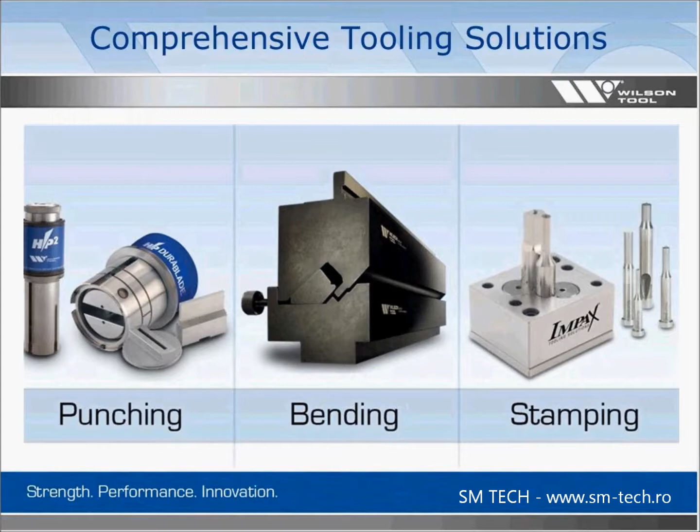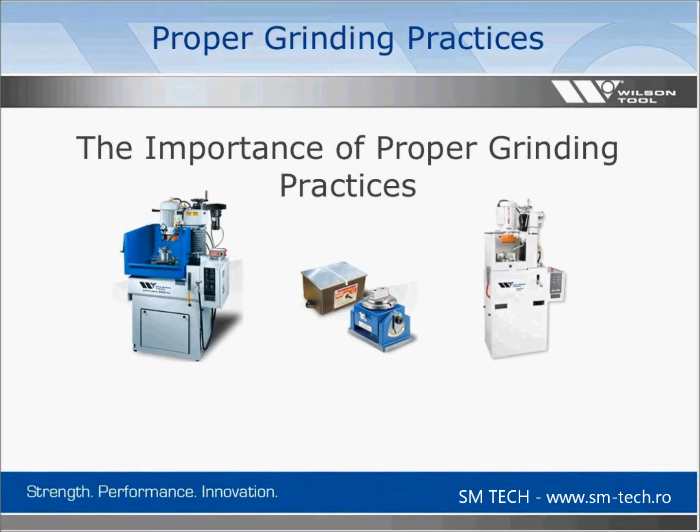We're going to start with maximizing tool life today, and the topics we're going to cover are proper grinding practices, surface enhancing coatings, and some of the different innovations in tool steels available in today's tooling. We're going to start with proper grinding practices. Proper grinding practices is one of the most basic functions that you can perform to ensure that you're getting the most life out of your tooling.

The number one most important thing when grinding your tooling is to apply coolant to the tool during the whole grinding process. Without applying coolant, heat buildup can result in an actual change in the metallurgy of the tool, and it can drastically affect your tool life. We recommend making very light passes with your grinder, only removing 5/10 to a thou in a pass, otherwise that excessive heat buildup can occur.

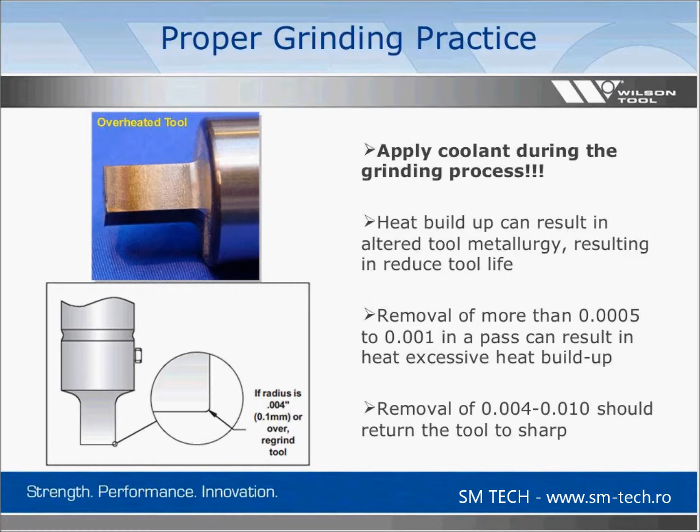When that heat buildup occurs, the tool can actually become brittle, or on the opposite end, it can actually become soft, and the tool will wear down much faster. You should never have to remove more than 4 thou to 10 thou of material in any given sharpening. After you've sharpened the tool, we recommend running an Arkansas stone or a light oil stone around the perimeter of the tool. This is to remove the burr.

You don't have to get aggressive with it, just run it lightly around the edge of the tool to knock down that burr. If you don't knock down that burr, when you're punching holes, it can mimic deflection or even cause excessive wear on one side of the tool, or it can mimic misalignment.

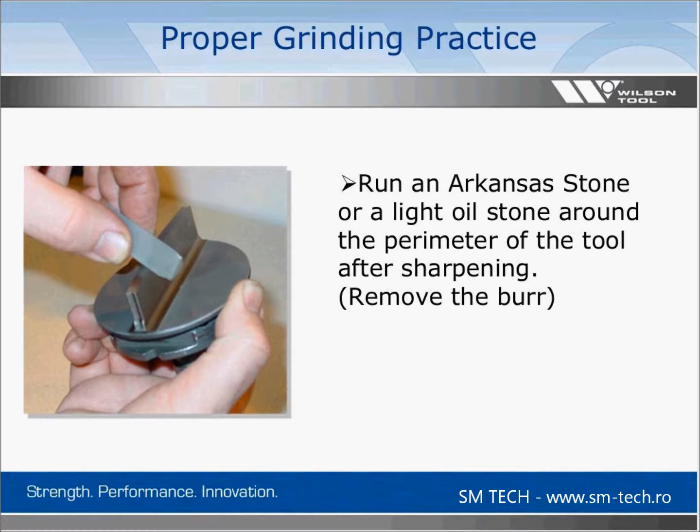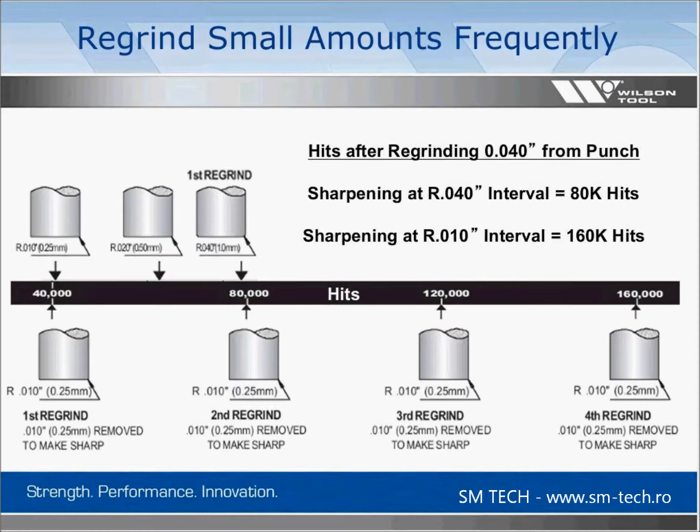This illustrates the benefit of sharpening your tooling in more frequent increments and removing less material at a time. The tools will last drastically longer.

Proper grinding practices and grinder considerations. Some of the different considerations when you're considering a grinder are the type of grinder. Are you going to use a bench or a pedestal grinder, a surface grinder, or a rotary grinder? We do recommend a rotary grinder for sharpening your tools.

You need to take into consideration the capabilities of your grinder. Does your grinder have auto feed capabilities, or is it manual feed where the operator of the grinder has to babysit the grind the whole time?

Do you have the necessary fixtures in your shop in order to do all the various styles of tooling that you have in-house? And do those fixtures also allow you to do the shear angles on your tool that the tools may possess? Also consider the quality of the grind.

How much material is being removed in each pass? Does your grinder use coolant? Is the wheel being properly dressed?

Building off the type of grinder, what type of manpower is required to run that grinder? Are you going to dedicate a tool and die maker to sharpening the tooling? Will you have a dedicated employee that is at the grinder all day sharpening tooling? Or can your punch press operator sharpen the tools while the machine's running the sheets?

And then finally, you have to consider the cost of outsourcing. How much is it the cost to outsource your tooling? How long does it take to get your tooling back?

If you're outsourcing tooling, do you have to buy backup tools to be able to run while the tools are out being sharpened? Is it more cost effective just to actually throw away the tools and replace them instead of sharpening? I've actually seen scenarios where customers were outsourcing their sharpening on the dies, and they were actually paying more to have the die sharpened than it costs just to buy a whole new die.

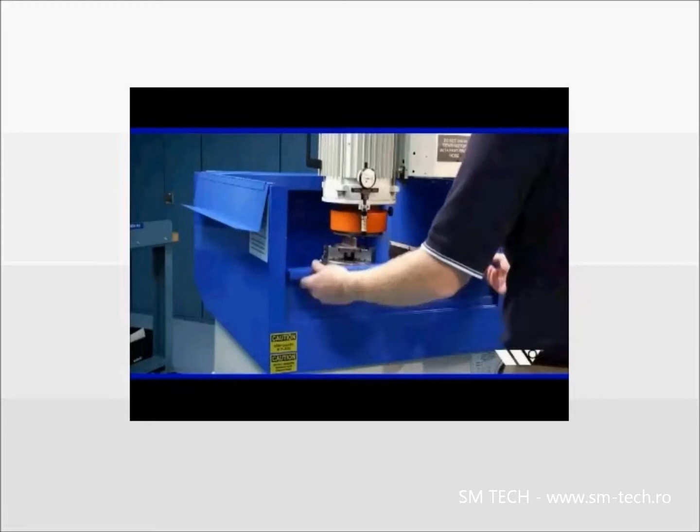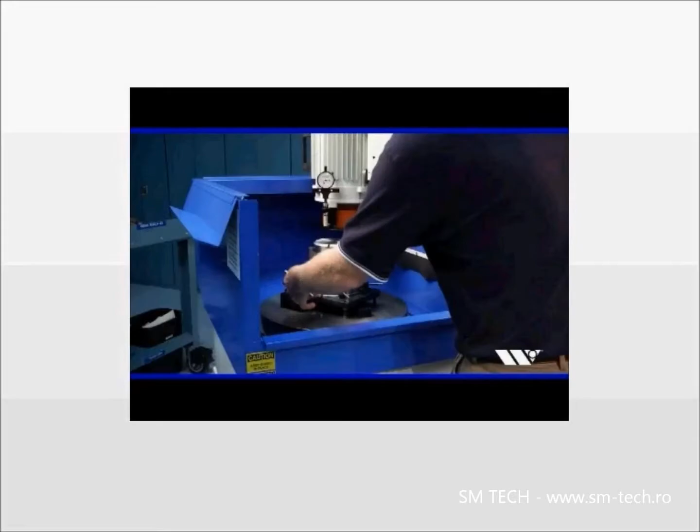The silent portion of that video was part of that video, so nothing went wrong there.

What to take away from this section of the webinar? Again, grind your tools more frequently, remove very little material, 4/1000ths to 10/1000ths per sharpening, make very light passes, 5/10ths to a thou with each pass of your grinder. It's going to make your tools last a lot longer.

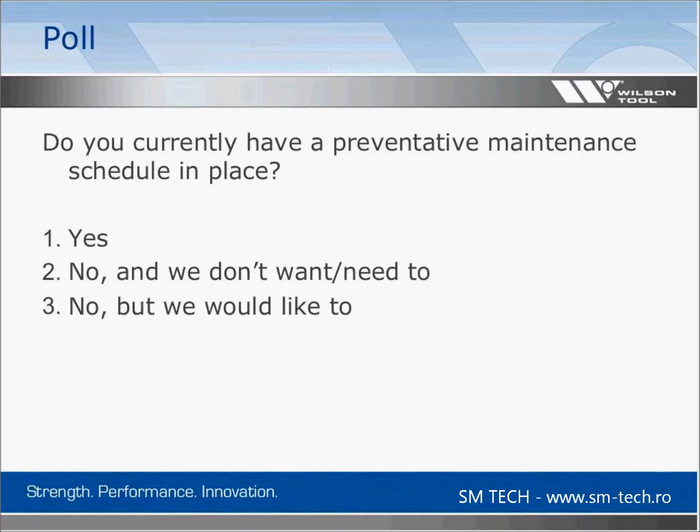Moving along, we're going to talk about maximizing tool life. This is going to cover some of the tooling innovations that have been made for today's challenging applications.

Some of the different challenges that fabricators are facing today include the type of steel that's being punched. We're seeing a lot of high strength and abrasive materials, your high strength low alloys, your common stainless steels which have been around for a long time. And then a lot more high carbon steels are being used today, your grade 50s and grade 80s. These challenging materials can even increase the tonnage requirements of your tooling and your punch press.

Some of the tooling solutions to battle these challenging applications include surface enhancing coatings. There's premium tool steels available on the market today, including powdered metallurgy. And then we can even change the geometry of some of the punches to better help decrease that tonnage requirement on your machine and your tooling.

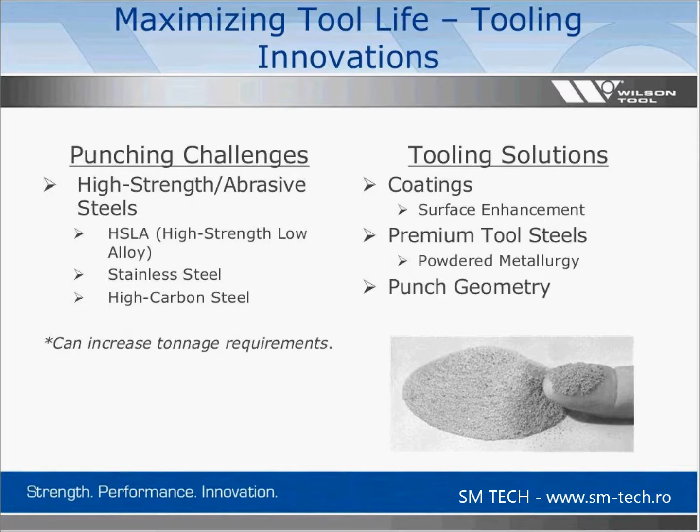There are 2 basic types of wear. First, there is abrasive wear. Abrasive wear is when the work material actually abrades the tool surface. The ways to combat this would be to replace tooling frequently, or you can add carbides and hardness to the tool itself. Or you can do both, surface enhancing coatings, and you can go to a powder metallurgy to increase that tool life.

Second, adhesive wear. Adhesive wear is where the work material actually sticks and rips out part of the tooling surface. To battle adhesive wear, you can look at surface enhancing coatings, or you can improve the surface finish of the tool. What I mean by improving the surface finish, you can actually polish the cutting surface of the tool, or in some instances, a bead blast even makes a difference.

If you're experiencing both abrasive and adhesive wear, you can move to a more shock-resistant tool steel and complement it with a surface-enhancing coating. Or you can look at powdered metallurgy, which can actually increase your shock resistance or increase your wear resistance.

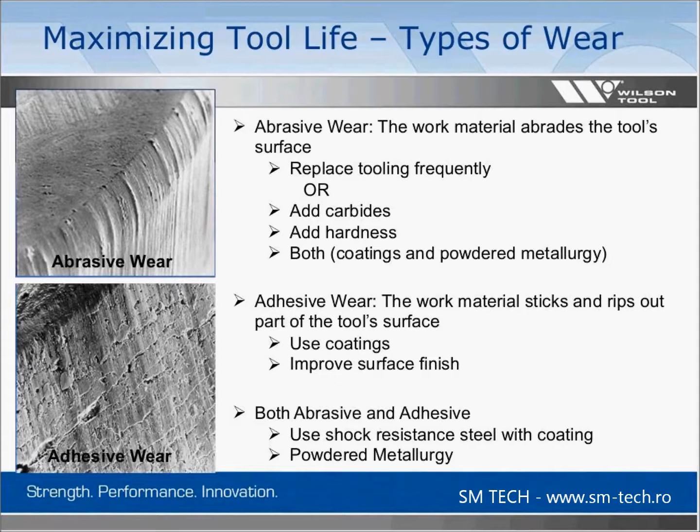We're going to talk a little bit about coatings, and I'm going to show you a quick video of a punch actually entering and exiting a sheet. What I want you to pay attention to in this video is once the punch goes through the sheet, you'll actually see the sheet itself retract and surround the punch. As that punch is stripping out of that sheet, that is actually when most of your wear is occurring. Two-thirds of all wear comes from the strip out of the sheet.

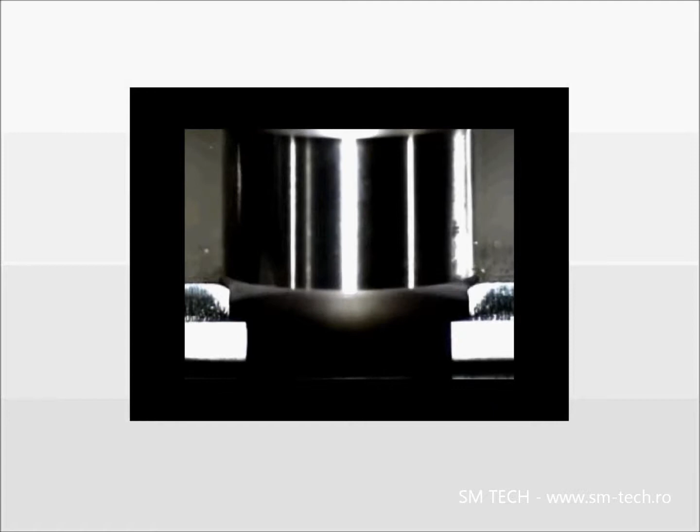As I said, two-thirds of all wear comes from the punch stripping out of the sheet. The use of coatings can greatly help reduce that stripping pressure and increase your tool life.

Coatings are used in both punching and forming. In punching, they're used to reduce friction between the punch and the sheet, reduce material transfer, you might know it as galling, between the punch and the sheet. Coatings can add hardness to the tool itself. And a common misconception about coatings is that once you sharpen the tool once, the coating is gone and it's no good. Coatings are actually not affected by sharpening.

Coating's only relevance is on the side walls of the punch itself. So when you're sharpening the top of the tool, it does not affect the coating on the side walls.

Coatings are also used in forming. They're very common on forming inserts and on the cutting edge of the forming tool. They help to reduce friction, wear, and edge buildup. They greatly reduce stripping pressure and tool wear. Coatings are often used on the forming insert in high carbon materials to help reduce that stripping pressure and actually allow it to strip out of the sheet.

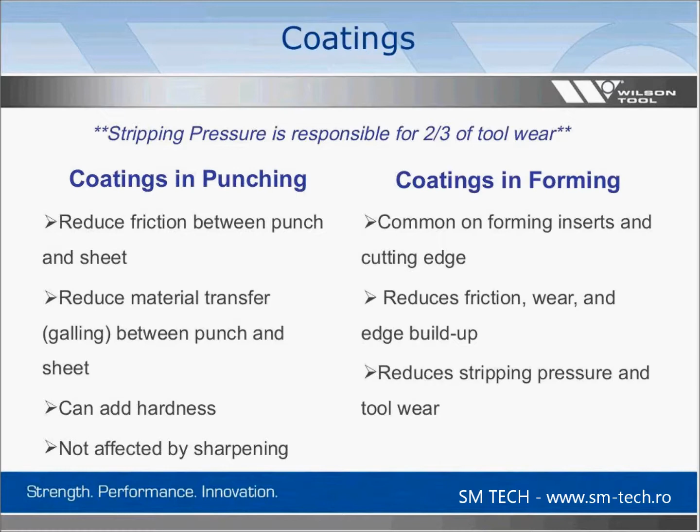Some of the coatings Wilson Tool offers today, we've got 4 general use coatings. They're not general use, they are application specific, but 4 basic coatings. We offer Wear Beater, which is a titanium nitride, your typical gold coating. We offer our Optima coating, a titanium carbonitride. And then we have 2 more specialized coatings called Nitrex and Slip Max.

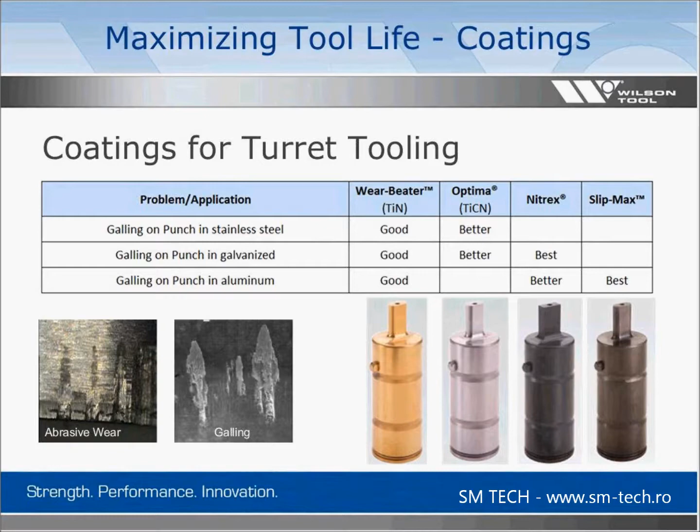A TiN coating, the gold coating, is a good all-around coating. Optima coating is an upgraded coating. It's great in stainless. It has a very low coefficient of friction and it adds significant hardness to the tool itself. Very good for stainless, however, it's not recommended in aluminum. Nitrex and Slip Max I see most often used in forming applications on those forming inserts to help reduce that stripping pressure coming out of abrasive materials.

Going to talk a little bit about tool steels and give you a basic education on tool steels. With any tool steel, there are 2 basic components. For illustrative purposes, as you see in the picture, we're going to refer to a cobblestone road, or you can even think of it in terms of a brick wall.

The matrix is the first component of any tool steel. In the illustration, your matrix would be the mortar of either the brick wall or the cobblestone road. The matrix is the base structure that holds the alloys together. Its purpose is not only to hold the alloys together, but it also establishes your toughness or shock resistance in the tool steel, and it sets the baseline for hardness. It also helps establish wear and heat resistance.

The second component that couples with the matrix is the carbides. The carbides are what actually provide your wear resistance to abrasion. In the illustration, your cobblestones would be your carbides. Carbides are hard, and they provide additional wear resistance and hardness to the tool steel. However, because they are harder, they can cause a reduction in the toughness or shock resistance of the tool steel.

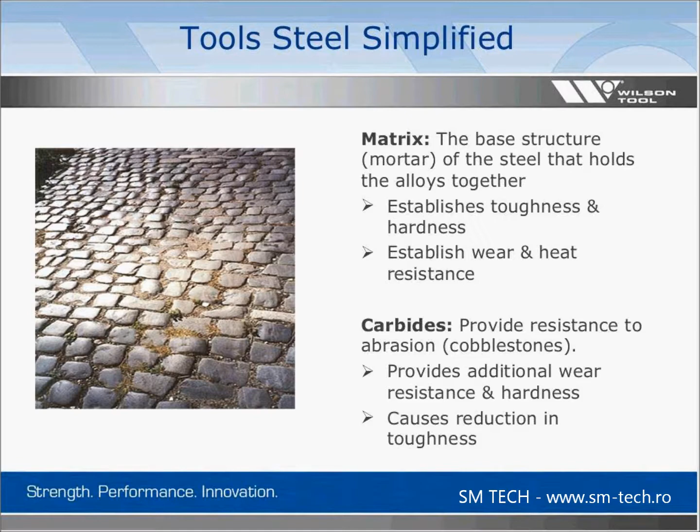There are two basic types of tool steels you'll hear about out there: conventional tool steels, and powdered tool steels, also known as powdered metallurgy. They're classified by how they are manufactured.

In conventional tool steels, due to the manner in which they're manufactured, carbides can tend to clump together. When carbides clump together within the matrix, it creates brittle points. Because carbides are a percentage of the matrix, and that doesn't change, when they clump together it also creates voids in the matrix, or soft spots. Those wear faster, and the brittle spots from clumping become chipping points—another form of wear. Voids in the matrix equal soft spots and promote wear.

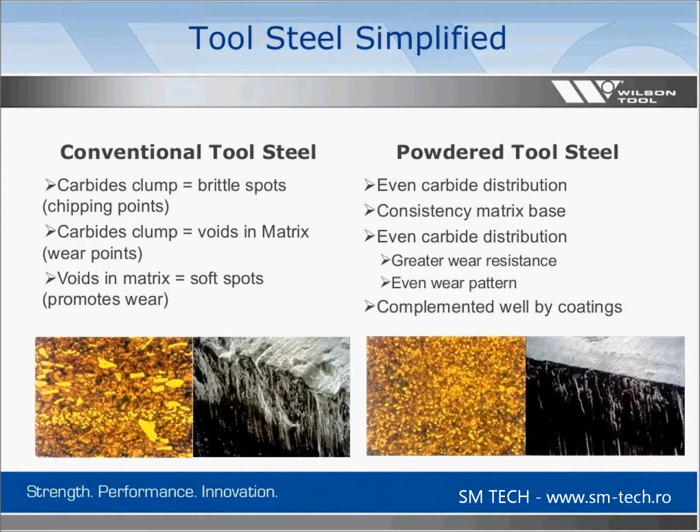Both conventional and powdered tool steels are well complemented by coatings. However, with the additional life you get from a powdered tool steel, coatings are a great complement to get the most bang for your buck. When applied correctly, powdered tool steels typically result in at least twice the number of hits before a sharpening is required. That comes down to the carbide distribution throughout the tool steel.

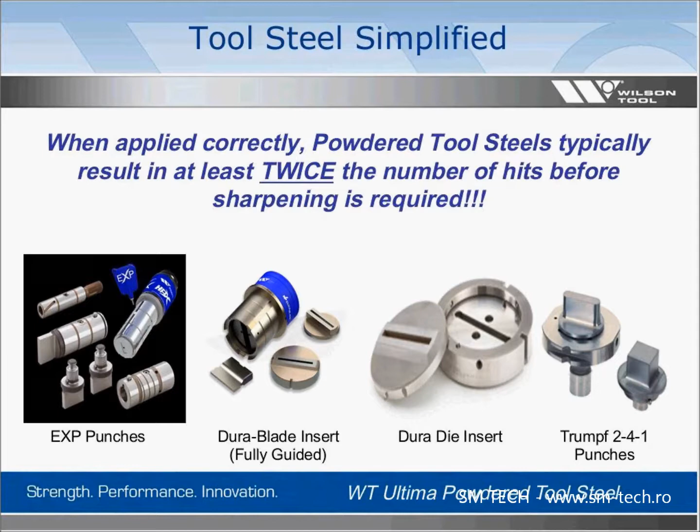Wilson Tool has started implementing powdered tool steels throughout their product lines. Some of the families of tools that currently use powdered tool steels include our EXP punch tips, our fully guided DuraBlade insert, the replaceable insert for our Dura Die, and our Trumpf 2-4-1 punches. We use powdered metal in a number of different tooling styles and also in a number of our dies.

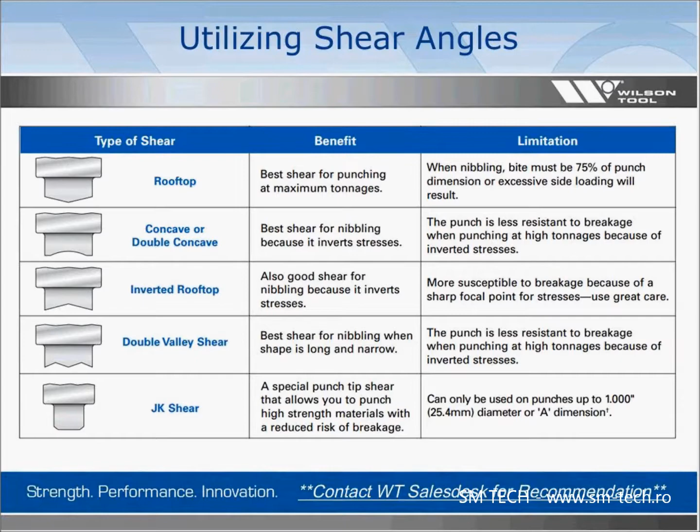In a previous slide, we talked a little about changing the geometry of the punch itself to reduce punching force. There are a number of different shear angles available that can be ground on your punches today. These become very application specific, so I'll keep this relatively high level—I do recommend you contact your sales desk representative to get a recommendation for your particular application. Probably the most common type is your rooftop, which helps reduce the punching tonnage required. This chart is available in your punching catalog, so please refer to that if you'd like to learn more.

I'm going to talk a little about maximizing your application efficiency. We'll focus on tools that allow you to streamline your applications to reduce setup time and cost, reduce your cycle times, and help you maximize your return on investment.

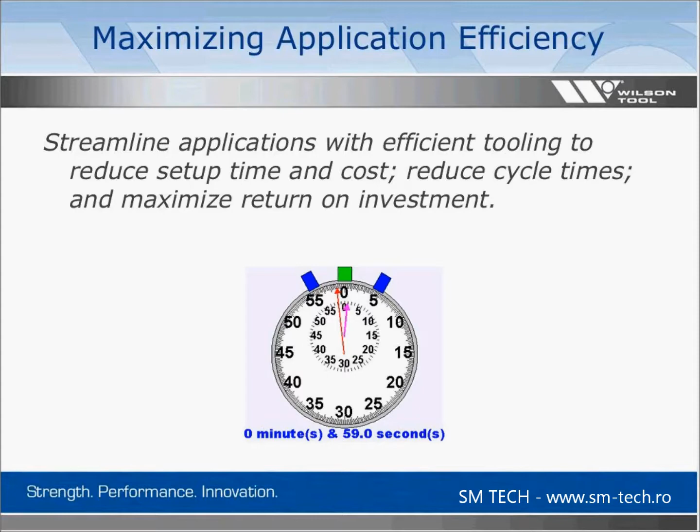The first application-efficient tool we'll talk about is multi-tools. Multi-tools are great in that they allow you to consolidate small tooling into a single station. This increases your machine's tooling capacity by consolidating small tools into a single station, which opens up other small stations so you can load additional tools. It reduces the setups and the setup time involved.

Because you're freeing up additional stations, you may not have to load and unload tools before moving on to your next job. It also helps reduce your machine cycle time, because with the tools consolidated in one station, you no longer lose time in either the turret rotation or a tool being returned to the rail to grab another tool to punch your next hole. The tool itself can just index to the next tool in the setup and you're off and running.

I do want to note that multi-tools are not available for all machines, and often they do require an auto index station.

Moving along to the next application efficient tool, I'm going to talk about cluster tooling. Cluster tools are great in large perforation patterns. They reduce your cycle times by punching multiple holes in a single hit. It's a very cost-effective method if you have a large perforation pattern. And no longer do you have to rely on your machine's hole-to-hole tolerance, because it's all in the same die, a cluster tool allows you to hold extremely tight center-to-center hole tolerance.

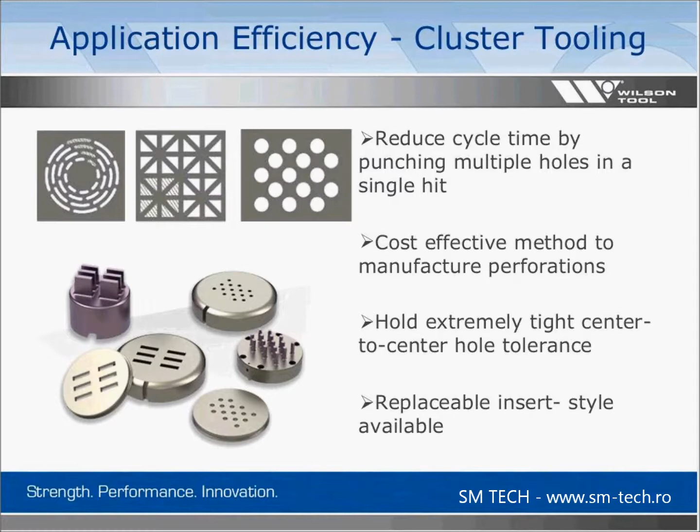Progressive cluster tooling mimics a progressive stamping die. However, with the lower volumes we're seeing today, looking at a progressive cluster tool can make you much more competitive in your quoting when you don't have to quote a very expensive hard tool for that progressive application.

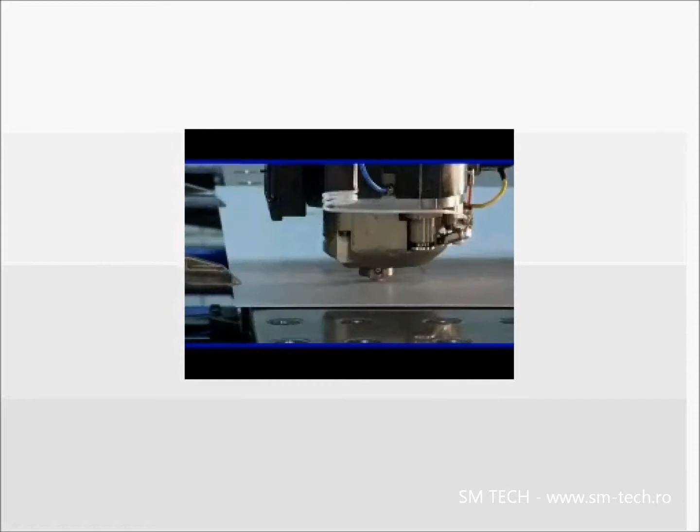So that was a little bit about wheel tools, and just to review, what we were covering there was a number of different tooling options that are going to help you maximize the use of your machine and make it more efficient. A lot of our customers we still find are just simply punching holes with their machines. We're just trying to show you and educate you on some of the items out there that will help you fully maximize the capability of those machines.

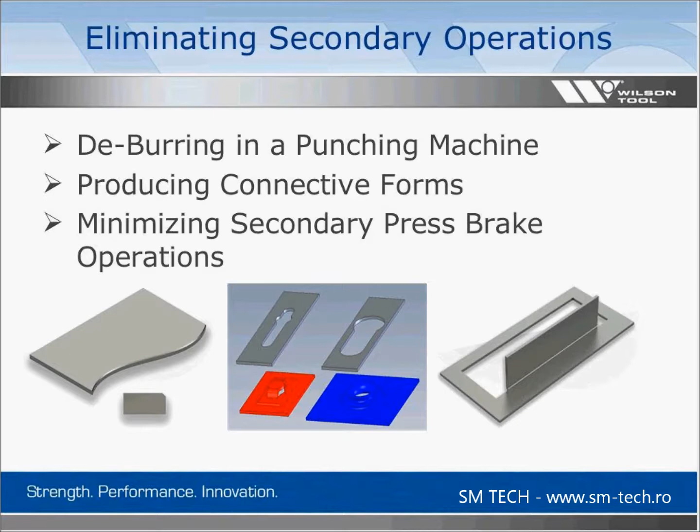I'm going to talk a little bit about eliminating secondary operations. We're going to start with deburring, a common function that everybody has to perform, and we're going to show you some ways to do it in your punching machine. Then we're going to talk about producing connective forms that allow you to join your sheet metal without having to take it to a secondary operation. And we're going to finish with minimizing secondary press brake operations, showing you how to do some of the forms in your punching machine so that you don't have to send them to the press brake.

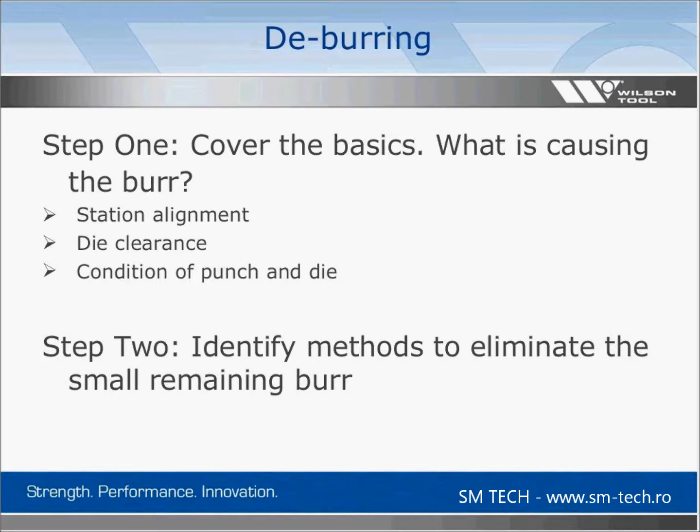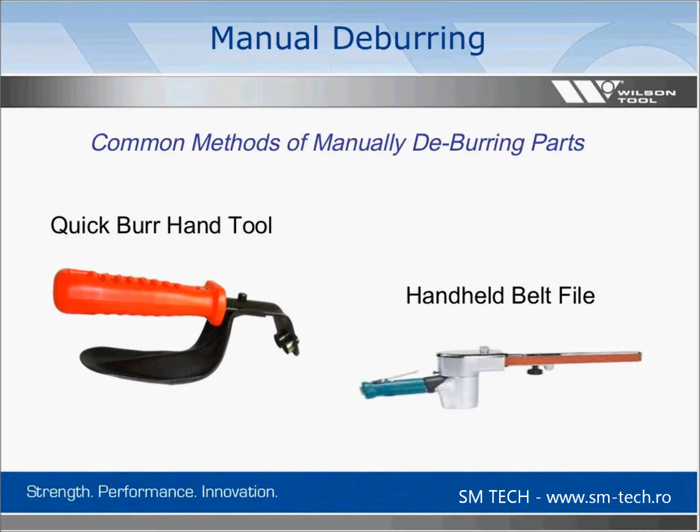The first step with deburring is to identify what is causing the burr. Check your station alignment. Are you using the proper die clearance? Is the condition of your punch and die in good working order? After you've identified the cause of the burr, identify the methods to eliminate the small remaining burr. Some common methods to remove a burr from your parts are manually driven. You've got your quick burr hand tools, which the operator runs down the edge of the sheet to knock the burr off, and very commonly a handheld belt file, which uses an abrasive to knock the burr off.

There are deburring tools available that you can run in your punching machine. Like the wheel tools, they do require a programmable ram. Currently, the deburring tools are offered in a thick turret style and a Trumpf style tool.

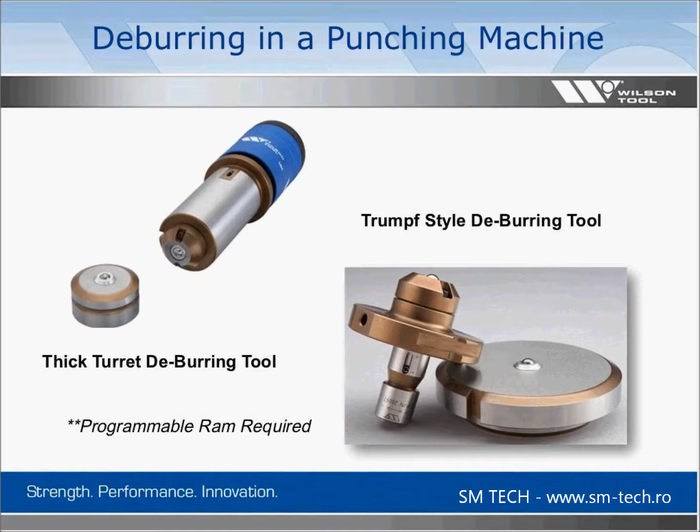How these deburring tools work is they use almost like a ball bearing that runs along the top and bottom edge of the sheet, and it actually coins the burr back into the sheet using pressure.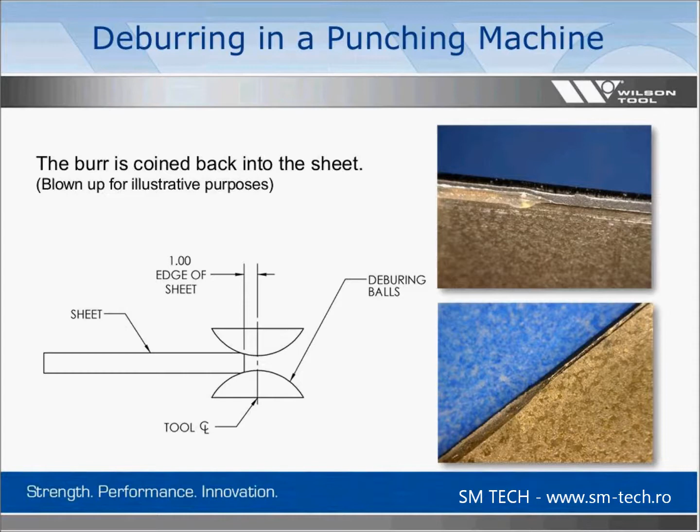Moving along, our final poll question. Are you currently forming in your punch press? If so, what type of forms are you currently producing? 1, countersinks, 2, louvers, 3, bends of 90 degrees, 4, other, or 5, I don't form in my punch press.

We found a lot of customers are currently just using their punching machines to punch basic holes, and there are a lot of different options to produce forms in your punching machine. This includes embosses, lancing forms, bridge lances, so on and so forth.

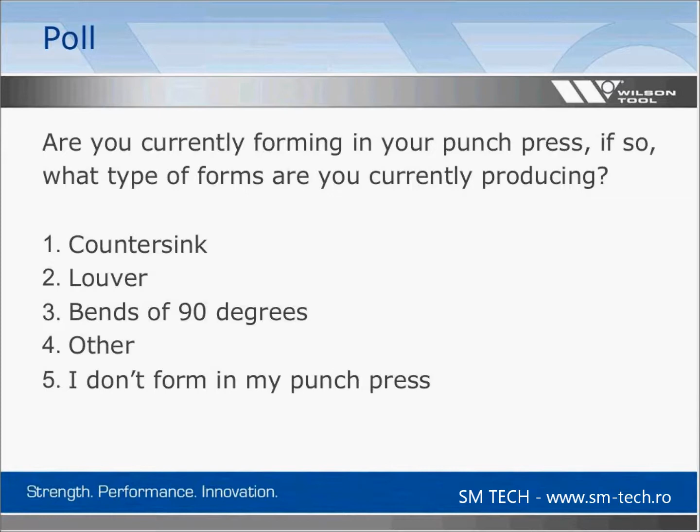I'm going to talk a little bit about connective forms, how you can join sheet metal without having to send it to a secondary operation. Eliminate the use of weld nuts, PEM studs, rivets, or even welding in some instances.

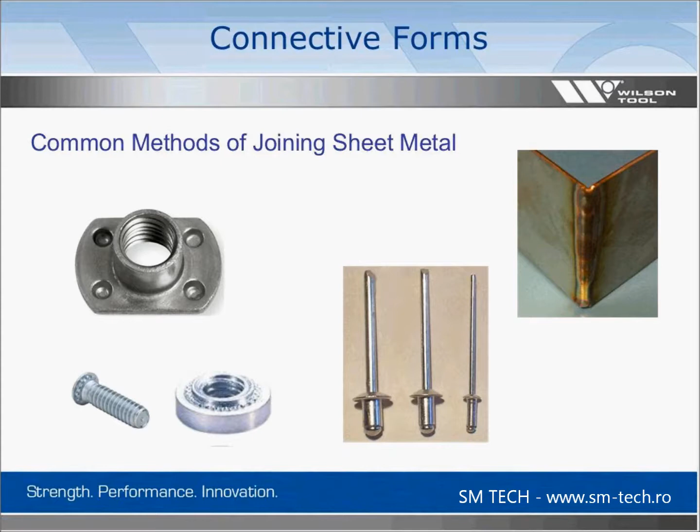One type of connective form is tapping. There are tools out there that will allow you to do tapping in your machine. Most of the machines do offer some kind of tapping option, whether it be a tooling style to do it, or an integrated tapping module into the machine.

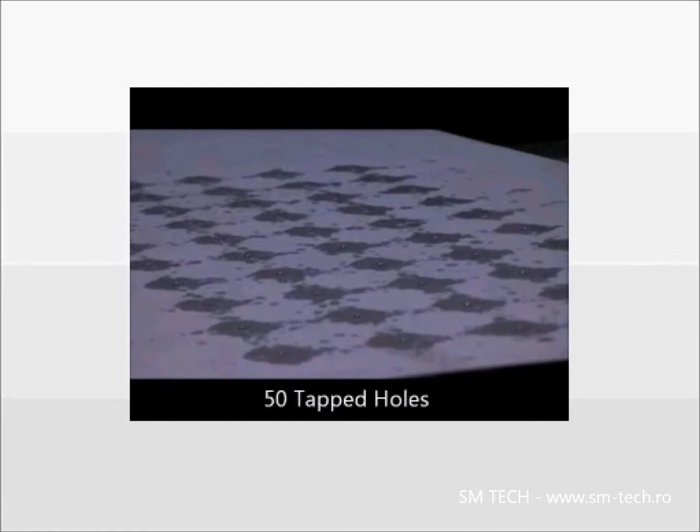Again, tapping is very common in the industry. There are tapping modules or tapping tools available for most machine styles. If tapping is a big part of your part mix, I do suggest contacting your machine manufacturer or your tooling representative to see what options are available to you.

Some of the other connective forms that are common, there's a connective thread form. Thread forms are typically used in thinner material. They're a light-duty fastening option that you typically see in the appliance industry. They're used where a threaded hole is required, and they are made specifically to a material and screw specification, meaning material type and thickness and what type of screw you are using.

Sometimes they require one tool. In thicker materials, they often require a pre-punch, therefore they require two tools. Again, light-duty fastening option, but very common. It's the Tinnerman-style thread form.

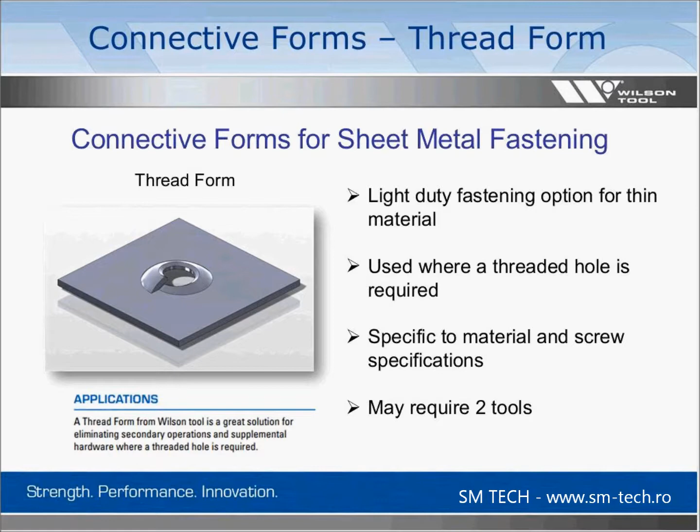Moving along, one of the options to eliminate welding is the ZipTech fastening system. ZipTech is a tooling option that replaces conventional welding and grinding, spot welding, and other fastening methods. How the ZipTech actually works is it creates a lance and form that fabricates snaps and allows you to push the sheets together. Those snaps do hold very tightly, and they're very difficult, if not impossible, to pull apart.

ZipTech does require two tools, and it is available in most tooling styles. Again, a lance and form style form that allows you to join two flat pieces of sheet metal.

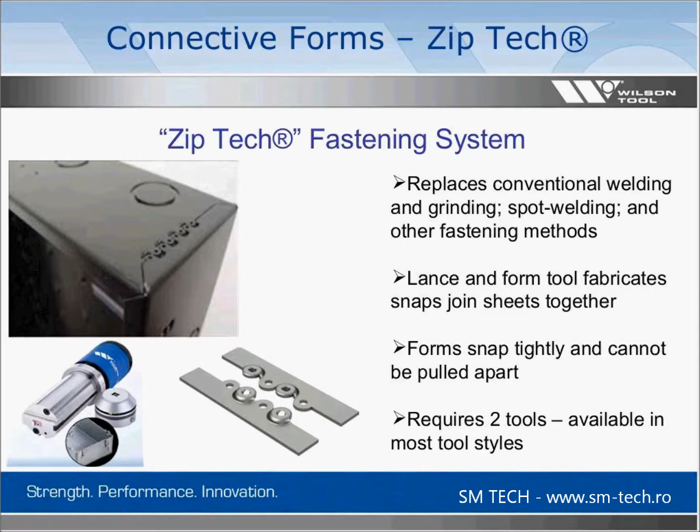The next type of connecting form that is very common is the hinge tool. There are two basic styles of hinge tool. You have your closed style hinge tool or your open style hinge. At least two tools are required in the closed style. Each knuckle requires a minimum of 3 hits to complete. And it can be completed on the edge of the sheet or in the middle of a sheet.

I'm going to show you kind of a neat little illustration of how the hinge tool works, just to give you an idea how it's formed in your punch press.

The next type of hinge style is the open style. The knuckles aren't rolled over all the way. They only require one stroke to form, and you can form three or more knuckles at a given time. They're great in that they allow for a larger pin diameter and are much more efficient. Only one tool is required. With the three hits required in the closed style, the efficiency of an open style results in 89% cost savings over the multi-hit method. Again, one tool required, one hit required.

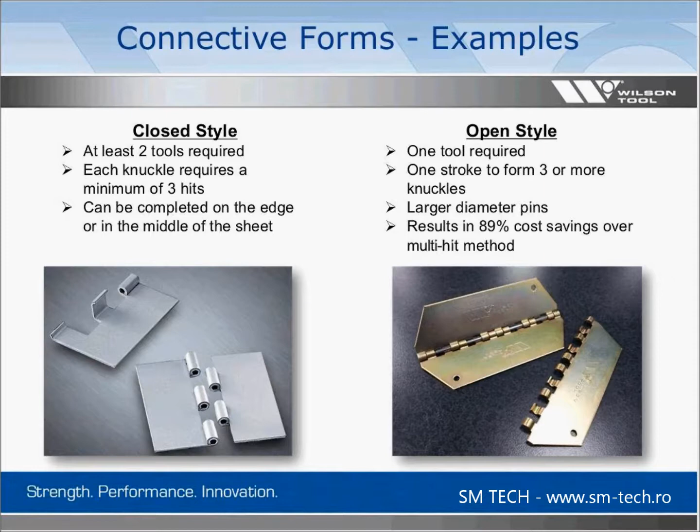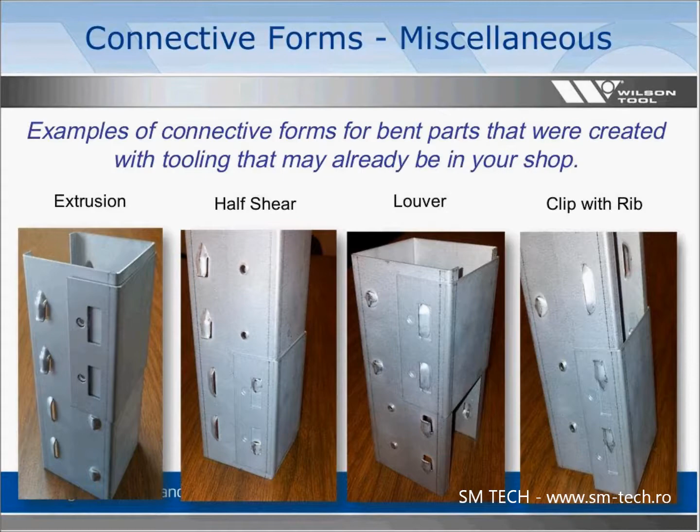Talked a little earlier about the wheel tools and the requirements for having a programmable ram in order to hold the tool down. Moving on to minimizing secondary press brake operations, there are options using rolling tools, or you can make your forms progressively in your non-programmable ram machine.

The first illustration is a progressive 90 edge form. You can do that with a rolling flare, or you can do it progressively with multiple hits. The great thing about wheel tools and progressive hitting is that it allows you to achieve longer forms in your machine via progressive hits or rolling wheel tools. It eliminates the need for expensive press brake tools and reduces cycle time for smaller batch quantities.

Often you have to move these parts to the press brake simply due to the length. Now, with progressive tooling and wheel tools, you can keep those in your punch press. One tool can produce forms of any length within your sheet parameters, as discussed.

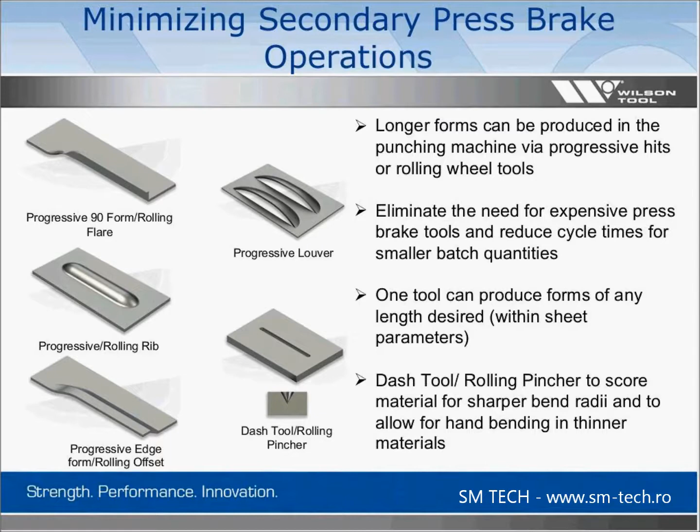One I want to point out in particular is the dash tool. There is a progressive dash tool, also known as the rolling pincher. What this tool does is it scores the material, which allows for a sharper bend radius than you may be able to achieve with a press brake alone. So if you score it first, take it to the press brake, you can get a tighter bend radius. It also allows for hand bending in thinner materials, so you don't have to send it to the press brake.

Moving on to the OptiBend tool. The OptiBend tool is a great way to eliminate the press brake in small flanges. It allows you to achieve bends up to 90 degrees in your punch press. It works by using a rotating cam in the die that bends the material during the punching stroke, simulating the cycle of a press brake. It's great in that there's little or no part marking on your sheet. The OptiBend is available in a single hit function, and also available in a progressive style. I'm going to show you a quick video of the OptiBend tool to wrap up.

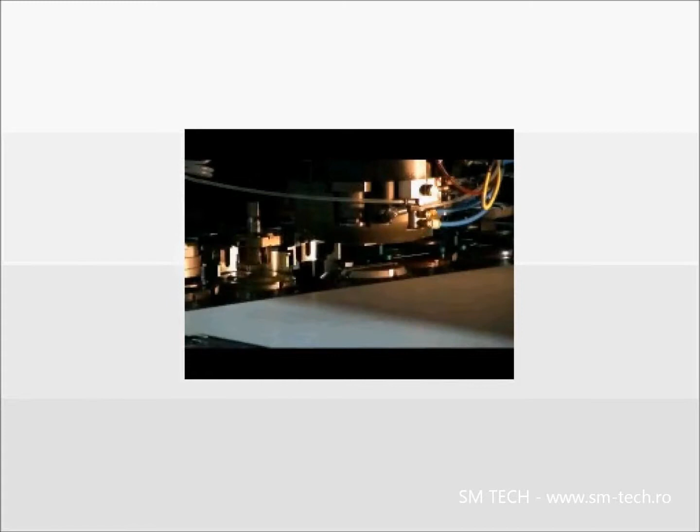What you saw in the video was the perimeter of the part being punched in the sheet, and then the flange being formed up to 90 degrees. Again, as stated earlier, you are limited to the flange height to whatever the feed clearance of your particular machine is. The machines vary in their feed clearances and range anywhere from a half inch all the way up to three and a half inches in some machines.

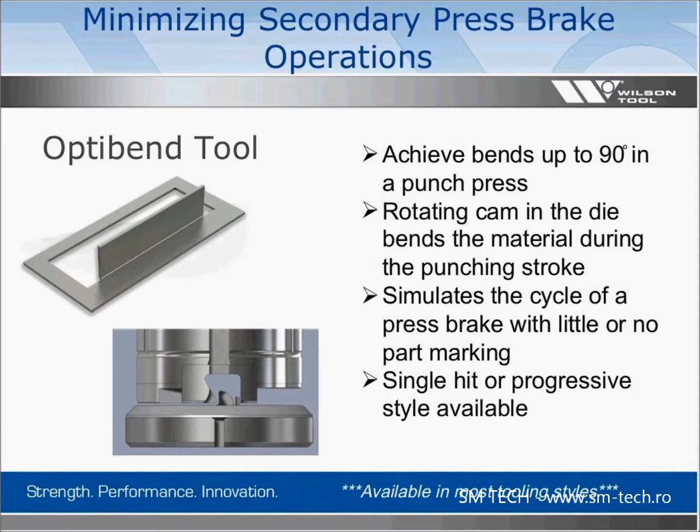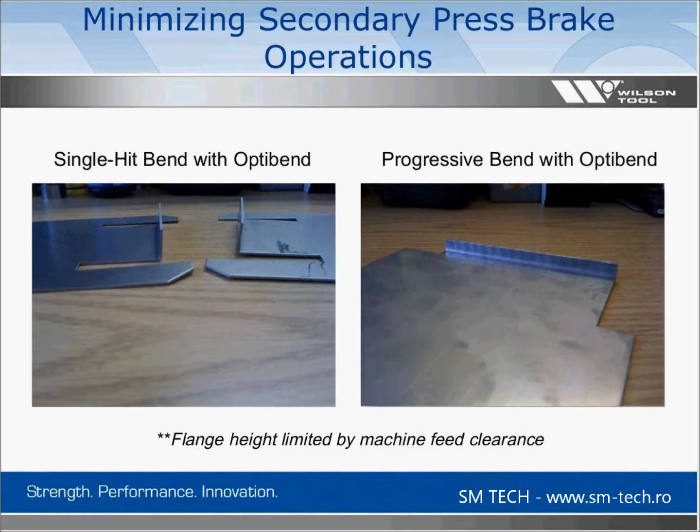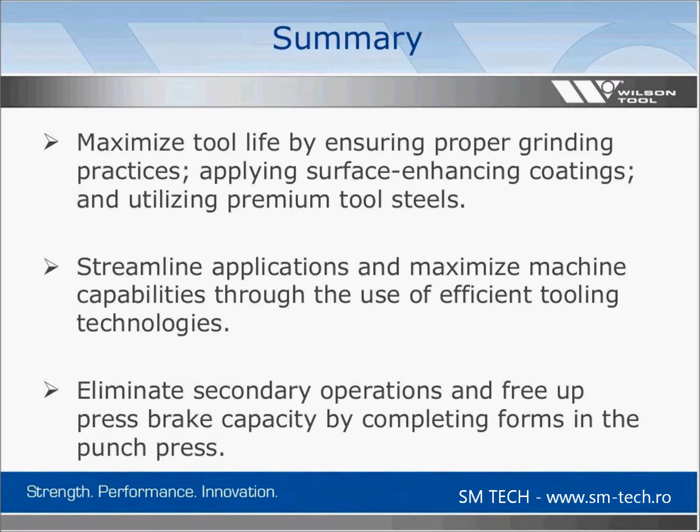So to wrap it up, we discussed maximizing your tool life by ensuring proper grinding practices, applying surface enhancing coating, and utilizing premium tool steels. We showed you how to streamline applications and maximize machine capabilities through efficient tooling technologies. And finally, we talked about eliminating secondary press brake operations and reducing capacity demands on your press brakes by moving work to the punch press.